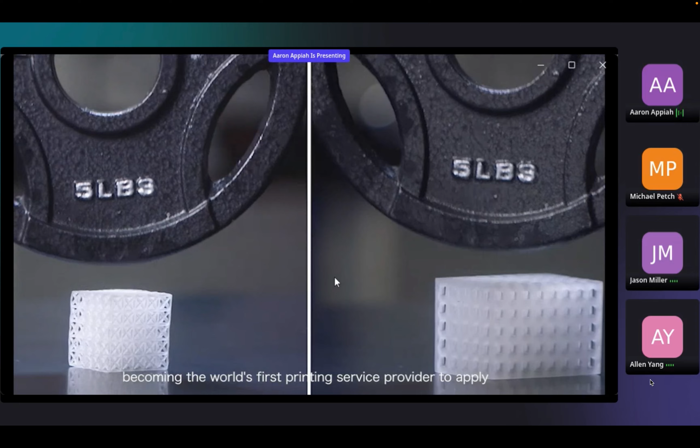Unionfab is Asia's leading 3D printing manufacturing company for rapid prototyping and on-demand production parts. We operate 5 mega production plants in China. Unionfab has more than 400 industrial-grade 3D printing equipment such as SLM, SLS, MJF, FDM, DLP, PolyJet, etc.

Supported by a self-developed intelligent factory digital management system, our timely delivery rate reaches 97%. Unionfab's parent company, UnionTech, occupies 60% of the market share for industrial-grade 3D printers in China.

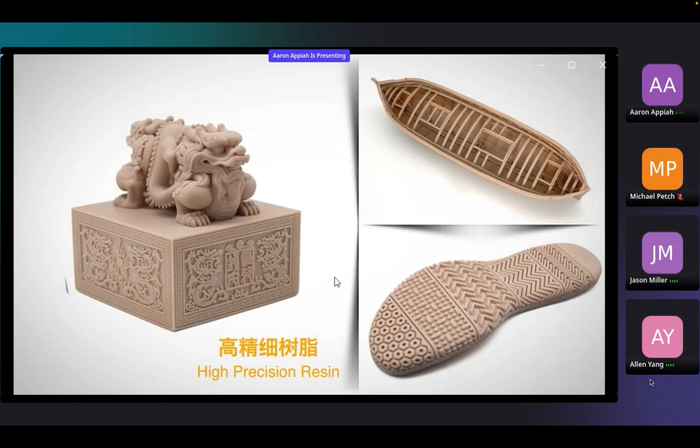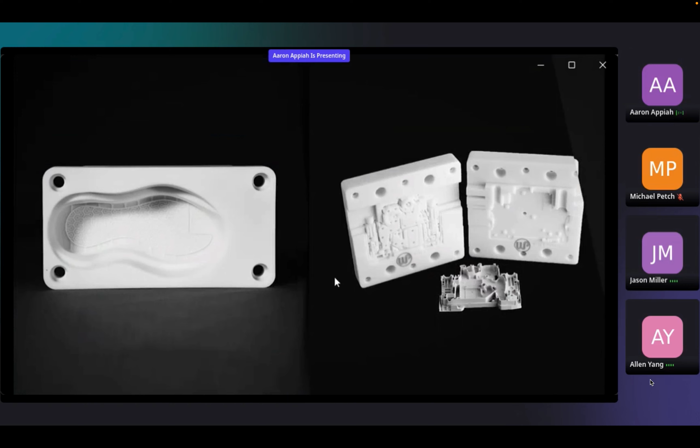Visit www.unionfab.com. Click Get a Quote, upload your 3D models, wait 5 seconds. The inquiry process is just so fast. 90% of complex orders are completed within 24 hours and others are quoted within 48 hours. It takes only 5 to 8 days to get the parts. It's that fast.

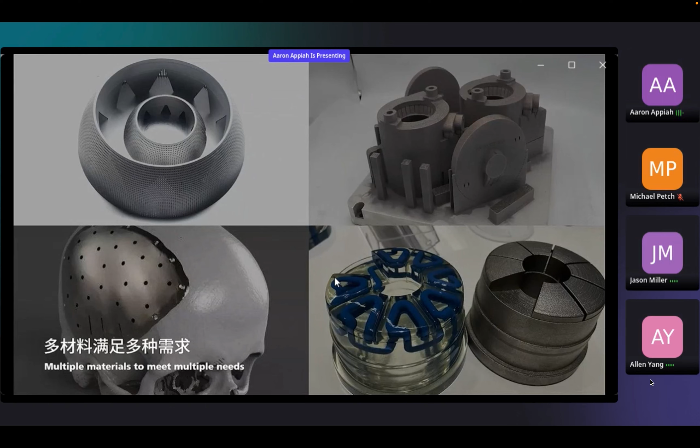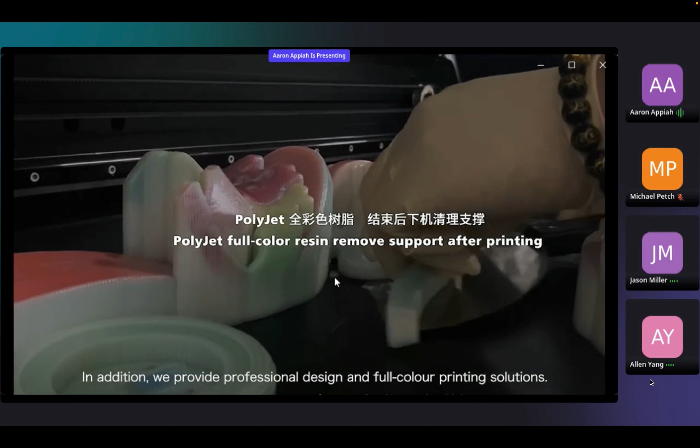Unionfab produces more than 80 3D printing materials, including resin, nylon, metal, and quick investment casting. With a 50% market share of transparent 3D printing, Unionfab is one of the top transparent 3D printing manufacturers.

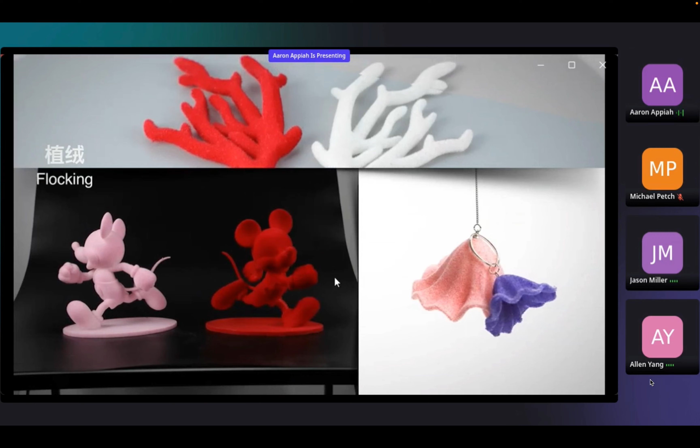We were one of the first service providers in China to introduce full-color printing equipment on a large scale. In addition, we provide professional design and full-color printing solutions.

The price of our printing service is 70% lower than that of European and American competitors. At the same time, as a priority DHL, UPS, FedEx member, we provide low cost for air transportation.

Just a few clicks and Unionfab puts stress-free manufacturing at your fingertips. Unionfab has a solid English-speaking customer service team which puts no language barriers between our customers and us.

In addition to 3D printing, Unionfab also provides a variety of processing technologies such as CNC, quick investment casting, injection mold, vacuum casting, and high-end model customization. Unionfab, your one-stop factory for manufacturing on demand.

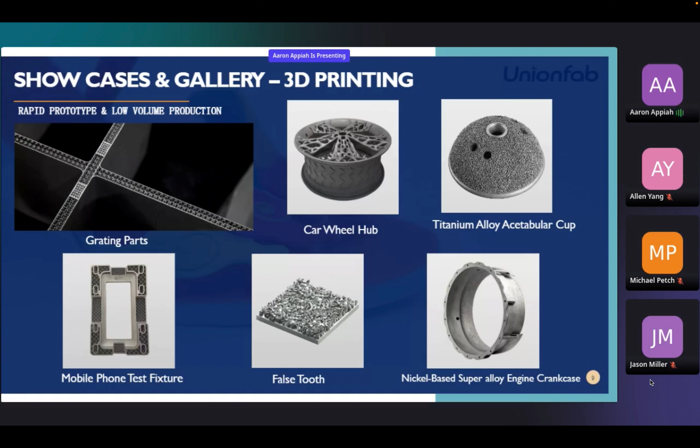With quality settled, logistics wise, currently we ship most by air service, that's with DHL, FedEx and UPS. Currently this is segmented based on continents, so with the least of 1 to 3 days and a max of 3 to 5 days, you should have the part delivered to your doorstep.

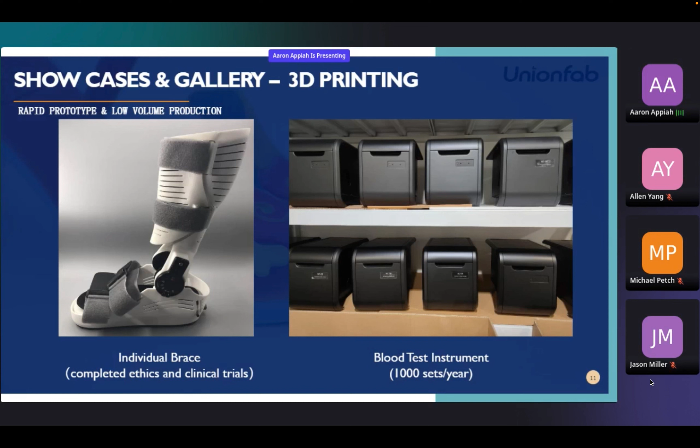This slide will be pretty much just showcasing some parts that we've been able to print at Unionfab, and it is pretty much a display. I don't have much to say, but if anyone has questions about it, I can answer. But these are some of the parts that we print at Unionfab, and we want you as a partner to see our capability as well.

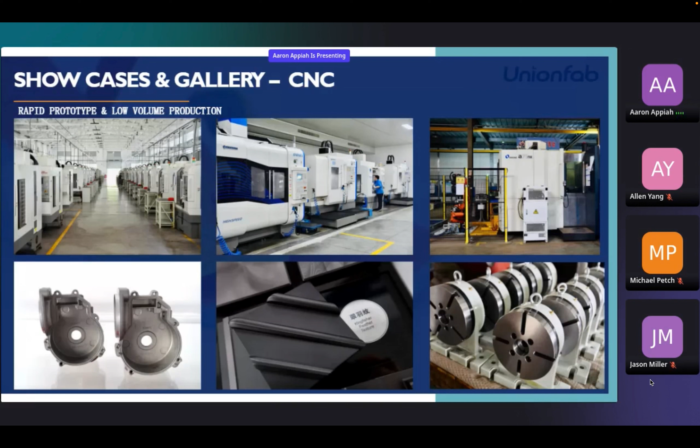So it cuts across from 3D printing to CNC. As I said earlier, we do have the capability for on-demand manufacturing as well. This slide here would be blood test instruments that we mostly would have printed, 1,000 pieces per year, based on different materials that are available.

And this would be our CNC section. You can pretty much see from the slide our CNC machines and some CNC parts that we do produce at Unionfab.

At this stage, there was a part where we said we were ready to invest in other 3D service providers. So what would happen here is I would invite Allen to speak to us. Then he would be able to explain how the investment works and how we, as Unionfab, would be able to give you as a service provider some of this from our end.

Okay, hello everyone. Hi Allen, and thank you for your time. I think everyone may have heard of 3D Systems. Yes, 3D Systems produces 3D printers and also provides 3D printing services. And so do we. Unionfab's parent company UnionTech sells a lot of printers to service providers all around the world. And Unionfab also provides 3D printing to tens of thousands of customers around the world.

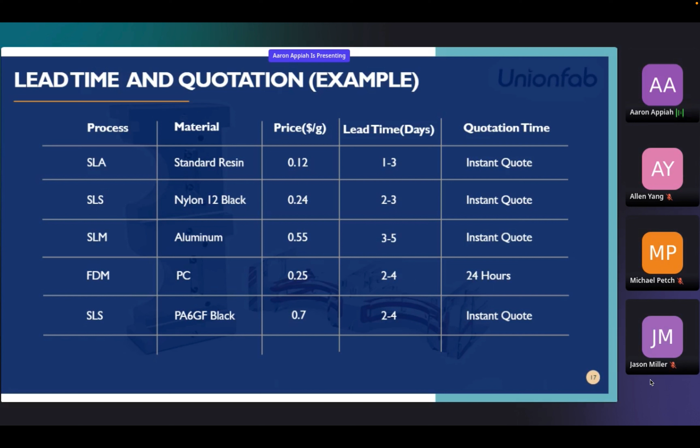The cost would be 0.24. The lead time is between 2 to 3 days, and quotation is instant. SLM aluminium would be 0.55, lead time between 3 to 5 days, quotation instant. With FDM PC, the quote is within 24 hours because we have to do manual work on it.

But aside from that, almost every needed technology or process now is pretty much quoted by Unionfab's system. I think Allen already said a little bit about it, so I'll just try to explain as much as I can so that it gives everyone a fair idea.

So to become a partner, there are some benefits that Allen mentioned. The first would be financial support, which basically means print and pay later on. It is available for both the silver and gold membership.

Then there is the quoting system. It's pretty much available for gold members. But if someone just needs that software on their website, it's also available for purchase, paid monthly. We can discuss that further later. It's also available for free for gold members.